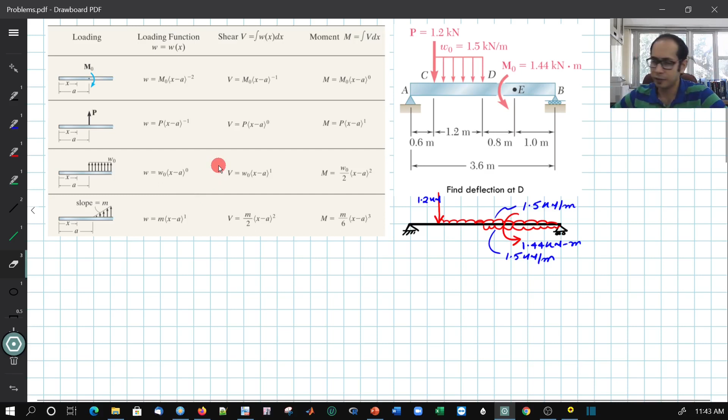Now, in this beam, of course, you need to find the reactions first, because the singularity function expression for the moment is written from the left all the way to the right. So I went ahead and calculated the reaction for this beam. This left hand reaction comes out as 2.6 kilonewton.

The right one, I'm simply going to mark and not even bother calculating, because in the expression that I'm going to write for the moment using the singularity function, the rightmost reaction is not going to come into place. So I'm just not going to bother about that one at all. So let me mark this reaction here as well. So here I have 2.6 kilonewton.

Okay, so now that I have all the loads put into the mold for using this particular table, let me go ahead and write the expression for the moment. It comes out as something like this. First, we have this 2.6 kilonewton acting vertically up, that is positive, and acting at 0.0. So the first one is going to be 2.6.

Why is it exponent raised to 1? Because for the point load, my moment becomes something like this. Okay, so next I have this vertically downwards 1.2 kilonewton load. For that, the expression acts at 0.6 meter raised to the exponent 1, and then I have my uniformly distributed load starting at 0.6 and continuing all the way to the end of the beam, open-ended.

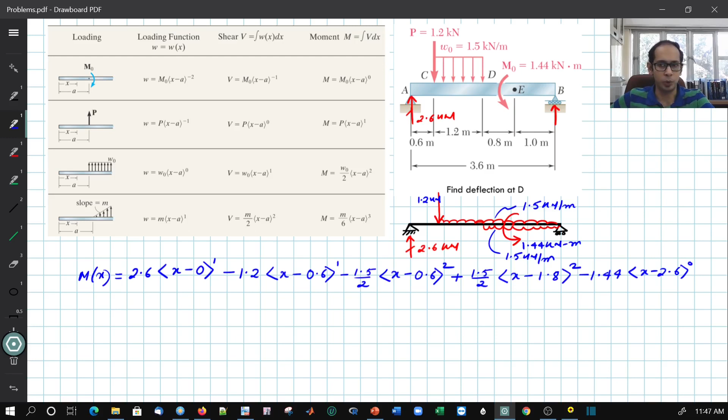But unlike that, using this method, with just one shot I wrote the expression for the moment for the entire beam. So now you know that your M of x is nothing but equal to EI d²y/dx², and all we have to do is to integrate this twice to get the expression for the deflection. So I have this written out already, and I will go ahead and write out the final expression that you get.

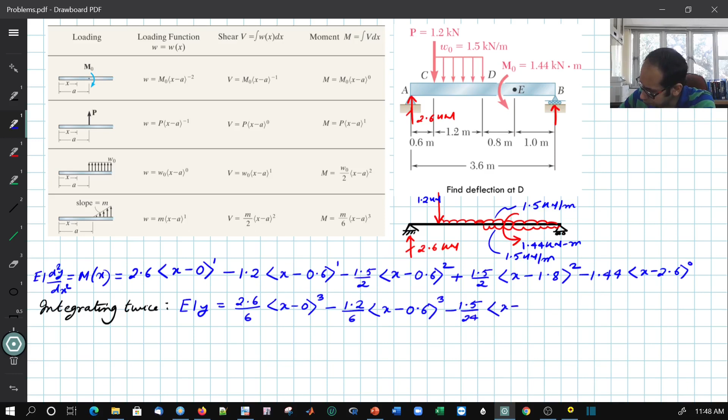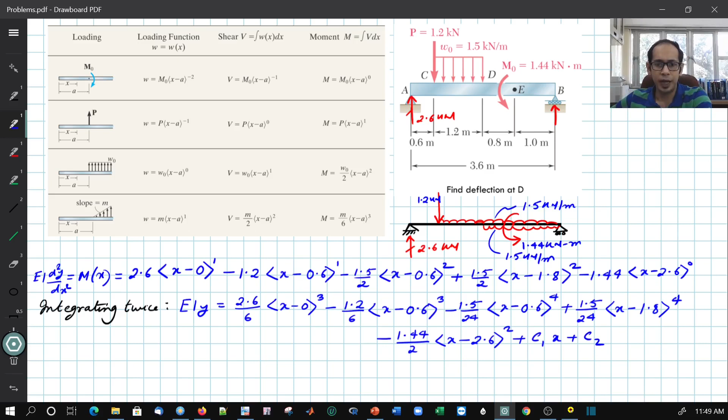So after integrating 2 times, this is the expression that we get over here, and we have also introduced 2 constants of integration, c1 and c2. We can calculate them from the boundary conditions that at x equals 0, y equals 0, and at x equals L, that is at 3.6 meters, y is also equal to 0. So now you know how to substitute these over here to get the constants c1 and c2. So let's go ahead and calculate the constants, what you will get after you use the boundary conditions.

So these are the values of the constants that you will get. You might substitute and calculate and come back and check whether you get the same expression or not. So now you have the equation of the elastic curve nicely written out in terms of x and the distances, and c1 is minus 2.692 and c2 equals 0, and the problem asks you to find the deflection at the point D. The point D over here is at 1.2 plus 0.6, so that is at 1.8 meters.

So now if you substitute 1.8 in this expression over here, this one will stay because 1.8 is greater than 0. This one will also stay, this one will also stay, and beyond that all of these terms are going to be 0 except this one. So you will see c1 times 1.8, but this expression within the Macaulay function is going to go to 0. This expression will also go to 0 over here. So once you substitute x equals 1.8 meters, that is at the point D, you will get the value of the deflection as

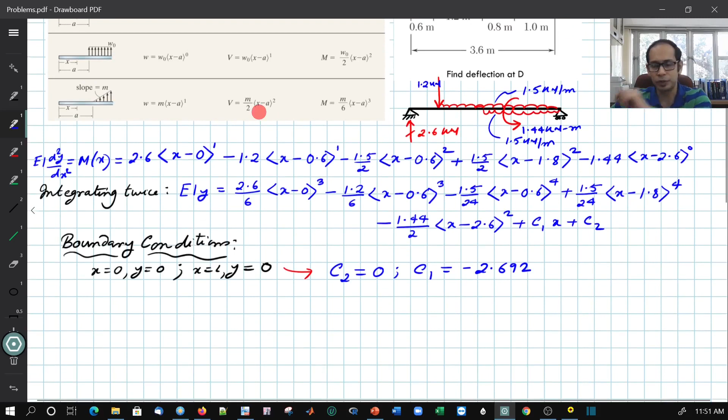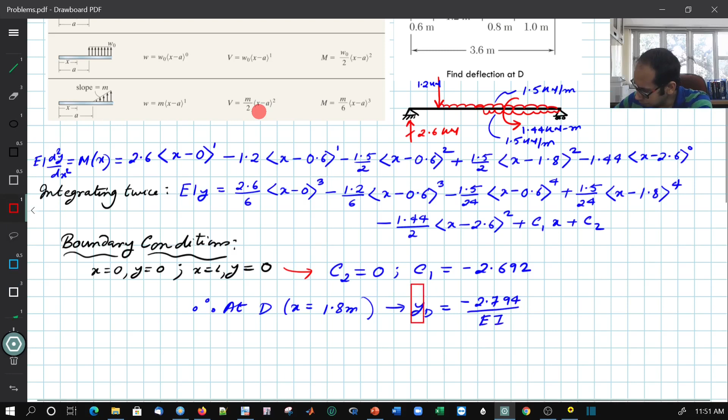So you see, in this problem, you get this deflection after literally just a few steps beyond writing this expression for the moment. Again, I would like to remind you, if you were using the second order method, you would have 4 or 5 sections within the beam, and depending upon the number of sections, twice that number will be your constants of integration. You have to use the end conditions and also the continuity conditions

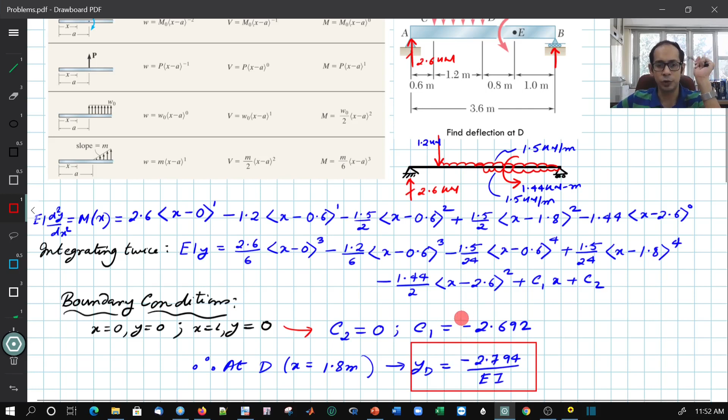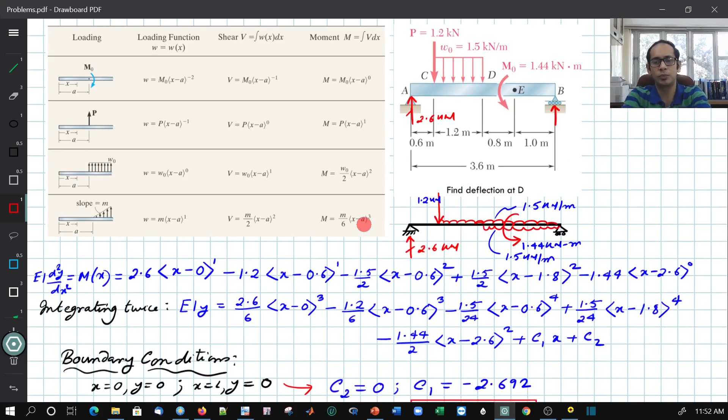to do all that algebraic manipulation to eventually get the constants, put them in the equation, to get the equation for the elastic curve, and eventually you will get to this, whereas using singularity functions you got it within just a few minutes after you could write one single expression for the entire beam. So I encourage you, when you're trying to solve problems, to use these singularity functions more and more to make your life easy and cut short the computation time for these problems.